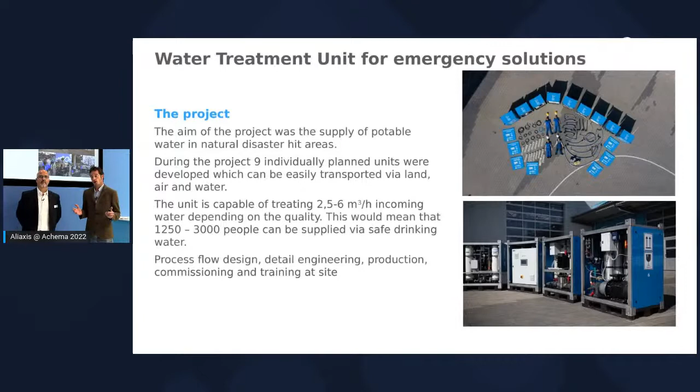And coming to you. This picture is showing you the unit already brought to the Philippines, consisting of sand filtration, ultrafiltration and reverse osmosis. It contains all the chemical tanks, the piping, the valves and fittings provided by Aliaxis, and we did the whole PLC programming, which means the unit was fully automated and could be operated after 2 days of training at site under real circumstances.

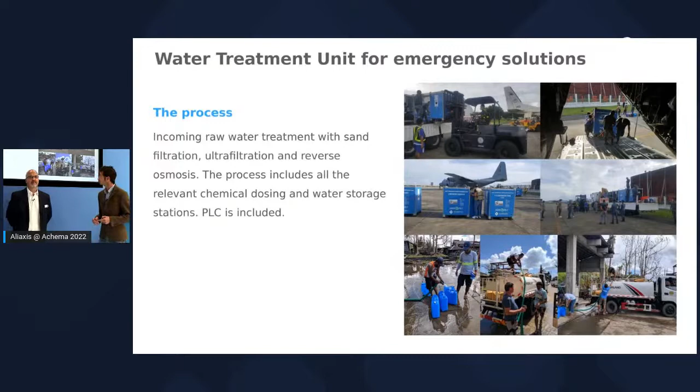The process flow is a very simplified one, showing you that chlorine was added to the incoming raw water to reduce the organic load and kill some bacteria. Then the water was sent to a sand filtration, which causes a rough filtering. After the sand filtration, an ultrafiltration unit was put in, which can remove bacteria and viruses with a log 6 and log 4 removal rate. And before the reverse osmosis, which was used to reduce the salinity, there is a unit with antiscalant and dechlorination, which is standard. And after, you get the treated water. So just to give you an impression: from that muddy, murky water to safe drinking water.

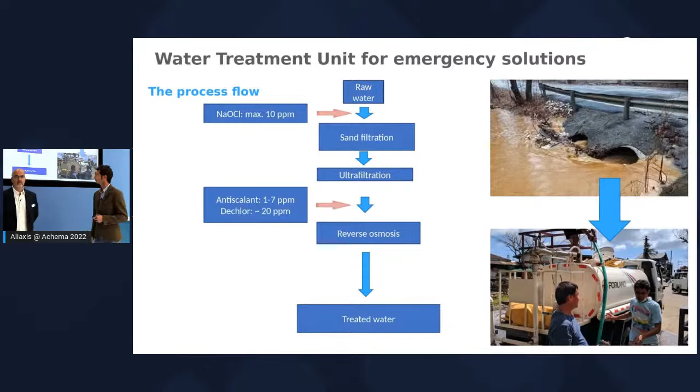The project was set up with the Civil and National Disaster Risk Reduction Office in the Philippines and the Hungarian Ministry for Innovation and Technology, Aliaxis as a parts provider for valves, piping and all other fittings, and Hydrofield, which is a classical OEM building water treatment units.

We are in close contact with the Aliaxis branch in Hungary. They have 50 co-workers and about a 300 square meter storage warehouse area where they have all the needed parts for this project, which was done in only 2 months from the planning to the commissioning and training. So it's a relatively short time. I need to emphasize this.

Marco is going to give you an overview of the Aliaxis group. So, yeah, Marco. Thank you, Lajos. Yes, Aliaxis is a global leader in manufacturing and distributing high quality plastic products for fluid conveying. As Aliaxis, we are present in more than 40 countries with 100 business units and distribution branches. Aliaxis is composed of more than 15,000 employees, and we have a very long experience in all the countries in which we operate. Thank you, Marco.

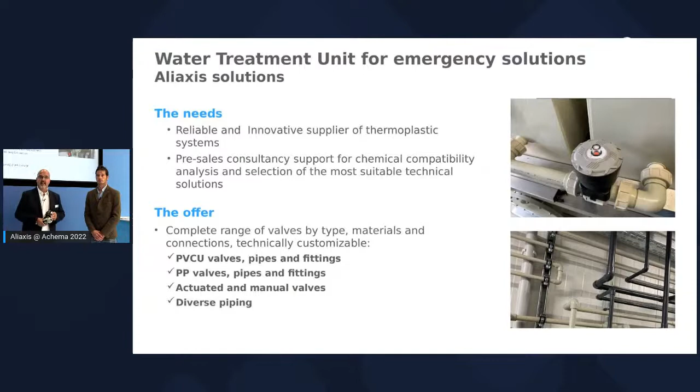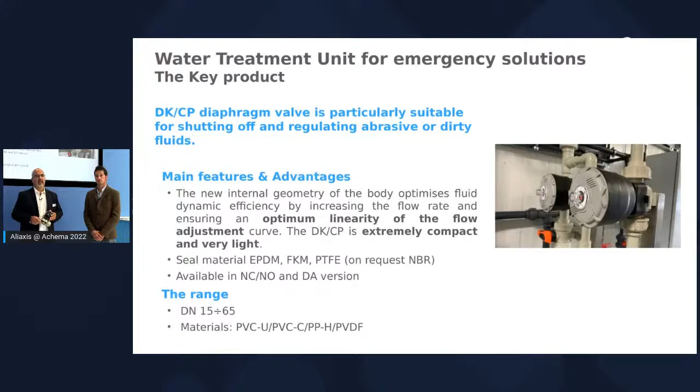So DK is a diaphragm valve suitable for the use of dirty fluids, both for cut-off or for regulating the fluid. The valve, in this case, has been selected with a pneumatic actuator, available in normally closed, normally open, or double acting function. Let's talk about the key features of this valve, starting from the design of the body. The innovative geometry of the body has been optimized to grant the best performance in terms of flow coefficient, providing a very, very high flow rate value, which was the key factor of this project.

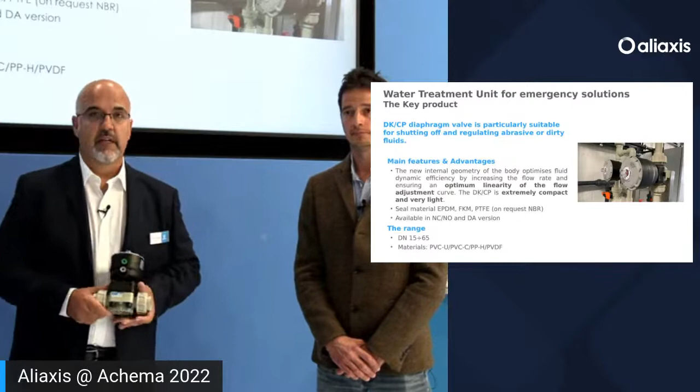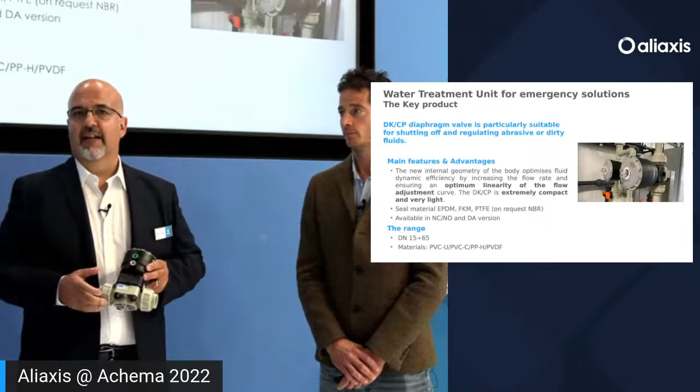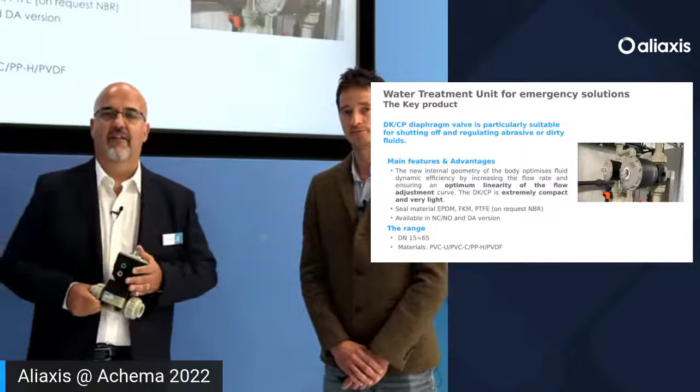This valve is available in different materials, so polypropylene as in this case, but also PVC-U, PP-H, PVC-C, and PVDF. Available also with different connections, so socket welding, flanged connection, and threaded as well. The main factor to select the valve was also related to the efficiency of the valve. This valve is able to work without need of maintenance for a very long time, and this is one of the factors that made Hydrofield select the valve. So that's all concerning the key features of the valve.

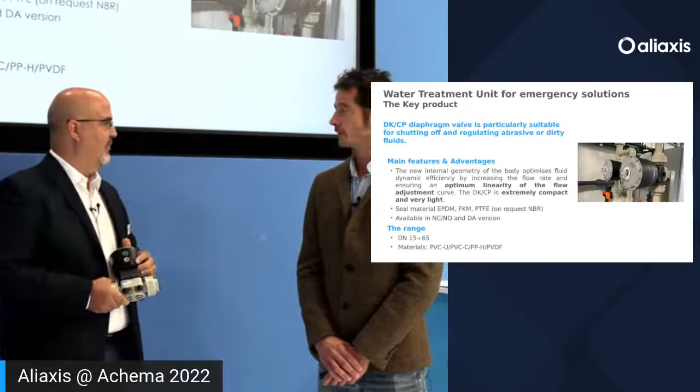Marco, thank you very much. Just for the closing words, this showcase was an example of reliable and good partnership between those companies and organizations. Maybe it's time not just to talk about the problems, but to take them in hand and solve them. We hope that we could offer you a good solution, an insight into how we work, which products we're dealing with, and which problems we can solve.